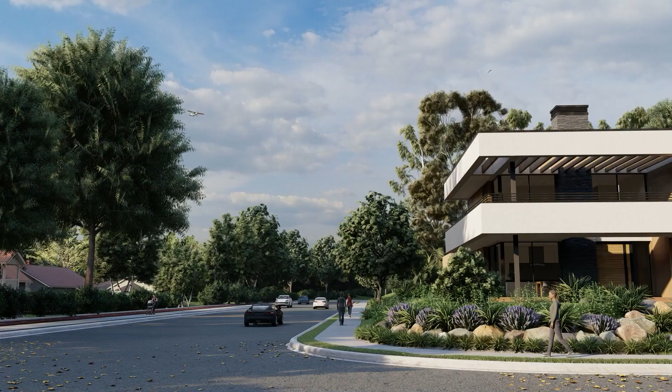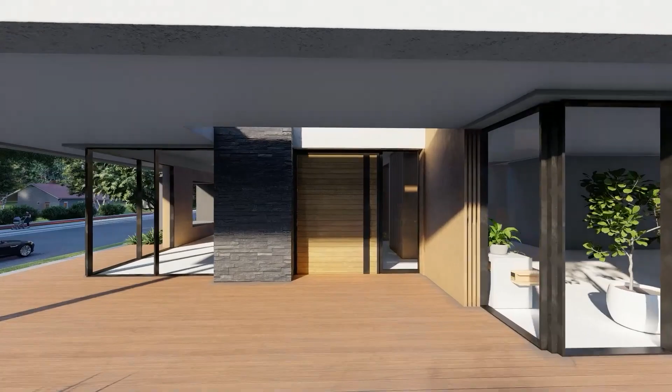Video clips and movies are crucial tools to make your clients live your design. It's not only the lights and materials, but also the narrative you create. It's the movement inside the space and the perspective at human eye level that you as an architect need to communicate for others to understand the subtleties of your creations.

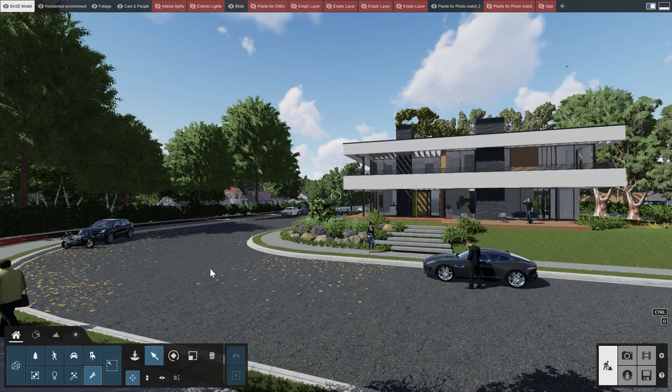Lumion comes with several features you can employ for your animations. The simplest way to understand this is in the hundreds of pre-animated library objects that you can place in your project. Take birds, for example. Simply select them and place them in your scene, and they will start flying in circles around the insertion point.

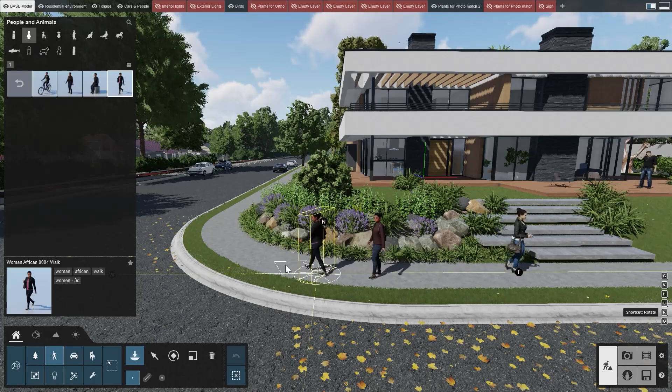Of course, these are not the only models that are animated. People in Lumion bring different animations to the table. Some are idle, some are walking, and some of them are even cycling. To make your people move, they require a trajectory to follow, unlike what we saw with the birds. A trajectory can either be from point A to point B, or a path.

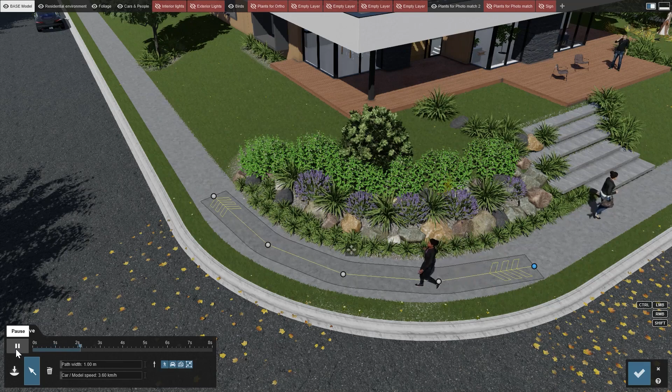The most common way to animate people along a non-linear direction, such as a curve, is to create a path. The Lumion 12 UI for the mass move effect comes with all the tools you need to control the direction you want objects to follow. Click on Edit, place a new path, then set the first point just behind the model you want to move. Now, move the cursor to a second point that represents the minimum required to define a path.

If you want to add more points, hold the Control key when clicking in the project. Then, you can use the Play button to preview the animation. If it doesn't work right away, move one of the points slightly. This will initiate the animation. To create smoother corners, click on a path point and you can increase the smoothness with the slider shown on the right.

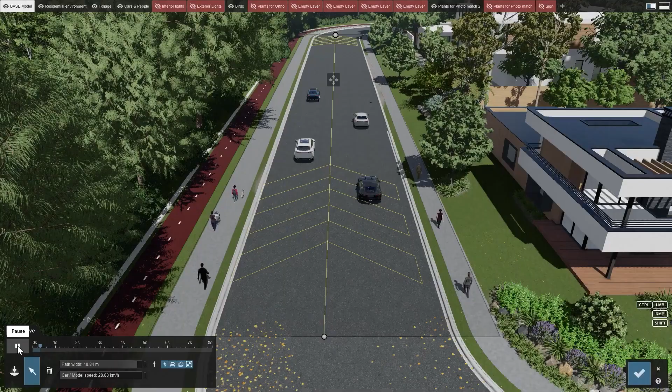The beauty of the mass move effect is that the path will move any object placed on it, which is great for moving multiple objects at once, including cars and cyclists. This way, you don't have to animate them individually. The 4 buttons under the timeline of the mass move effect indicate the types of objects that will move. You can select or deselect categories that you want to be affected by a path in your animation.

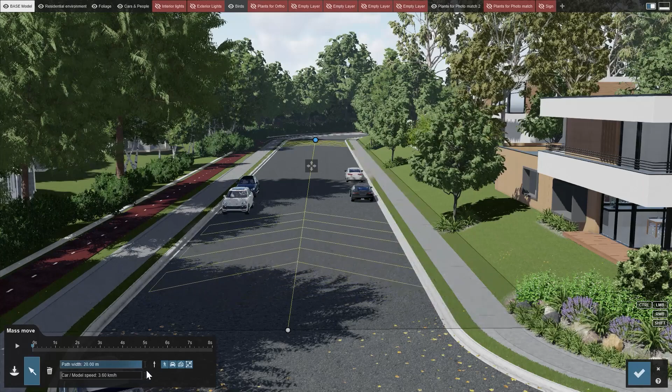At the same time, if you need the objects to move in the opposite direction, just click the direction toggle to reverse. Let me show you. Take these cars, for example. Click on Place New Path and set the first point in the center of the road. We'll keep it simple, so let's just add a second point in a straight line and make the path really wide to cover both the pedestrian path and the traffic lanes.

Set the car speed slider to about 30 kilometers per hour and test if the speed is adequate. Place a few more people on the pedestrian walkway and move the cars a bit further apart. Click on Play and you will see all the cars and people start to move. When an object reaches the end of the path, its position is reset to the start point. This is not necessarily desirable in a video clip, so try to keep it off camera.

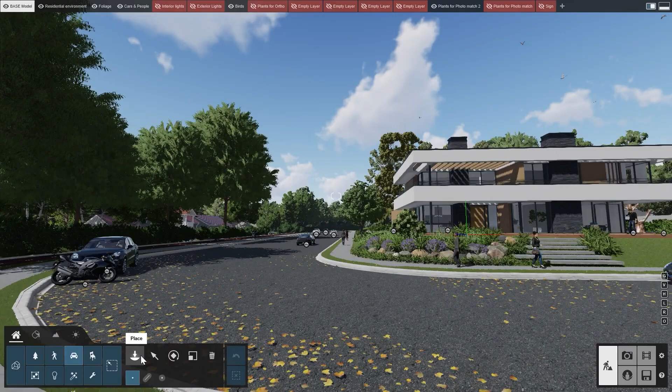Let's suppose you need to create more complex movements for a single object. Advanced Move is the effect that allows you to do that. Say we want to show a small aircraft flying in the background. Click on Place, choose the Air category, and select one of the flying planes. Place it in the far distance at a height of 100 meters.

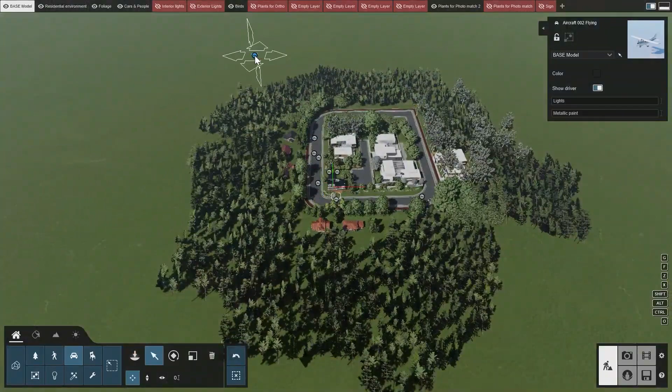It's probably best to zoom the camera out a bit so you have a better overview of the scene. Now, let's make a new animation clip at eye level. For example, here at the walkway opposite the house, add the Advanced Move effect and click on Edit.

Next, we need to select the object we want to move. Add the first keyframe using the little icon with the plus sign. Now, move the time slider to the end of the animation and set another keyframe.

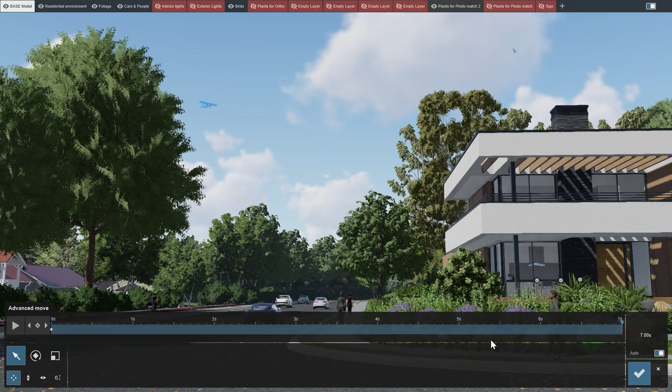To get the results we want out of this animation, we need to move the plane to the location desired for that moment in time. It can be tricky and you can either calculate it or eyeball it. First, click on Move Horizontal to keep the plane at the same height. Then drag it to the end position.

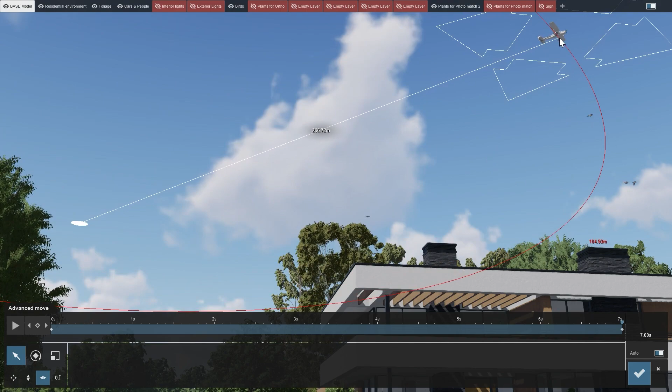Click on Play. Looks pretty reasonable. Now, let's see how it looks from the camera position of the clip. Click on Save Changes and then click on Play. You can always go back to edit the start and end points, or if you want to make a more complex animation of the plane.

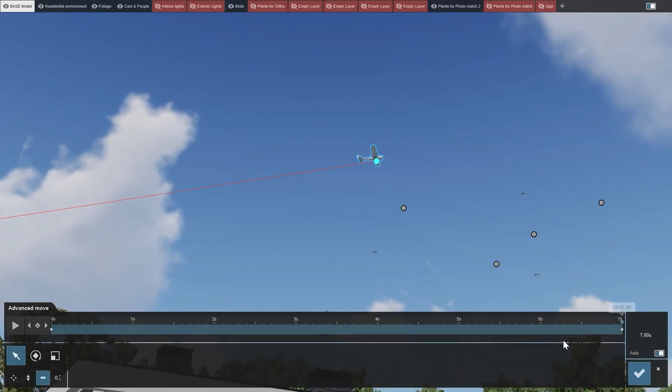Eye-level walkthroughs are a great way to showcase your work, especially since they give a good sense of space for the viewer. A great use for the advanced move effect in this context is to open doors while the camera moves through them. To make that happen, we need to separate the door from the house and export it as a separate object. Let me show you.

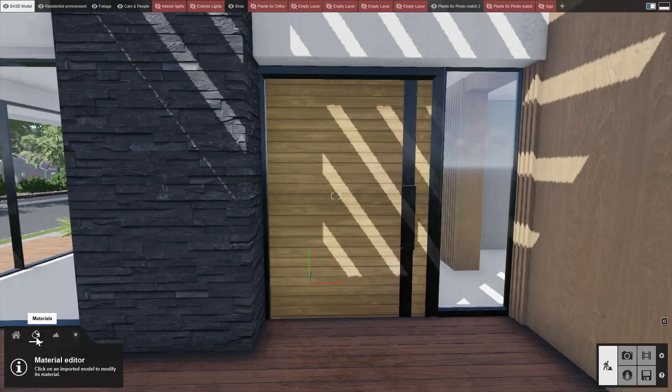Let's first save the materials we use for the door to a custom material, which will allow us to instantly reapply it to the door object that we'll import in just a moment. In your 3D modeling software, in our case SketchUp, create a separate grouping of the door. Hide the door and save your file.

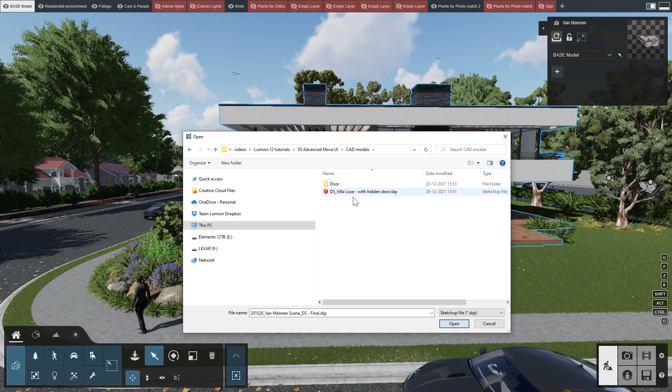In Lumion, select the house and click on Re-import Model. If you gave it a different name, press the Alt key. Now you have the house in Lumion without the door, but with all the material settings you made in Lumion preserved. Now, let's import the door as a separate object.

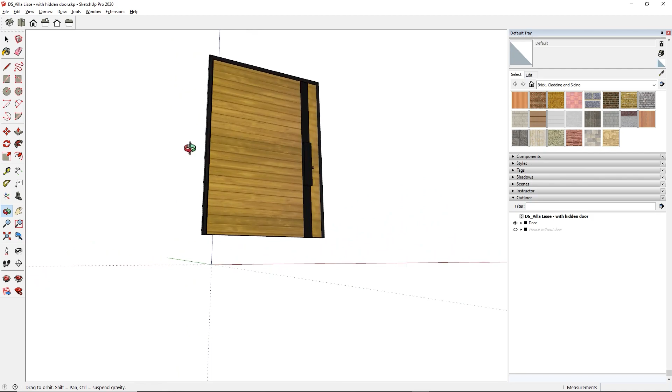Go back to SketchUp and hide everything apart from the door group. To make the door rotate around its hinges, we need to first shift the hinge point to the file's origin point. Now, export the object as a Collada file. Make sure you tick the Export Only selection set in the Export settings.

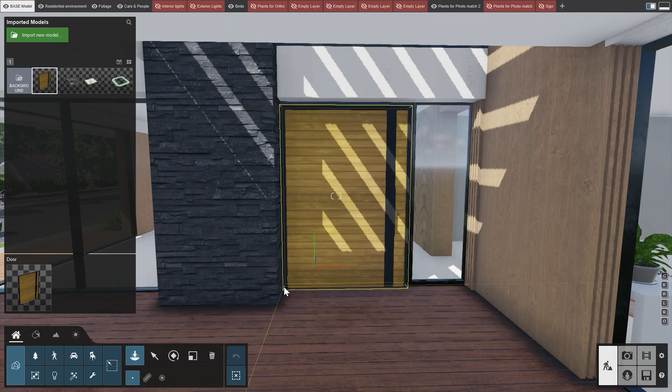Import the door object in Lumion. Place it at its initial location in the door frame and add the door materials again. Now, let's make an animation that starts in front of the house and goes through the door and ends inside, all at an eye level height.

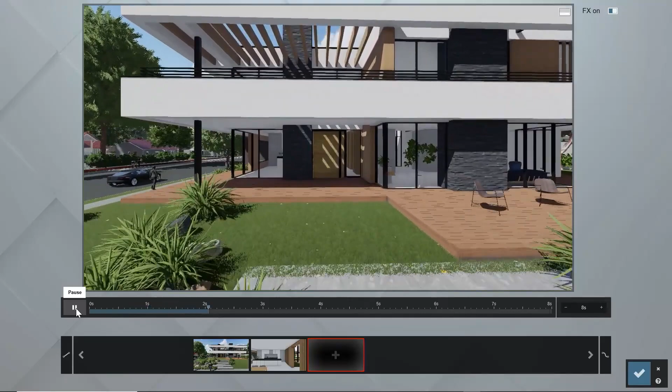That goes a little bit too fast. Increase the time to 8 seconds and set the ease out to smooth. That looks much better. As we approach the door, let's open it. At 5 seconds, it should start to open, and at 7 seconds, it should be completely open.

Add the advanced move effect. Click on Edit and select the door. Add a keyframe at the 0 timestamp, another one at 5 seconds, and a third one at 7 seconds. At the third keyframe, set the door rotation heading to 90 degrees.

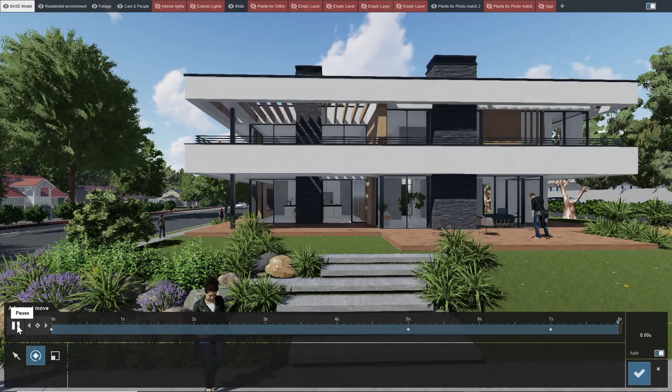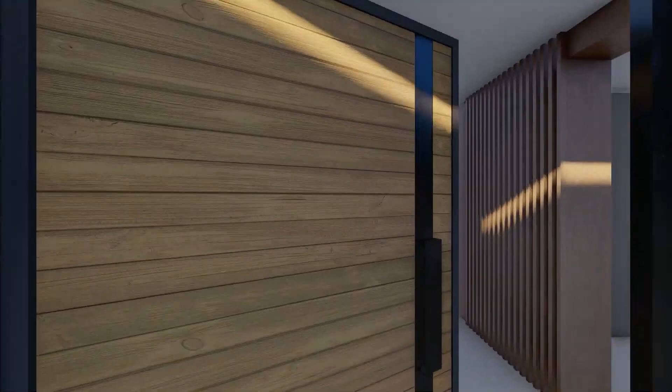As you can see, the door starts opening at 5 seconds and is completely open at 7 seconds. This is easy. Let's add the daytime style and render the clip. Looks pretty nice to me. As you've seen in this tutorial, animating objects in a Lumion clip is pretty straightforward. All it takes is just a few clicks and we're done.

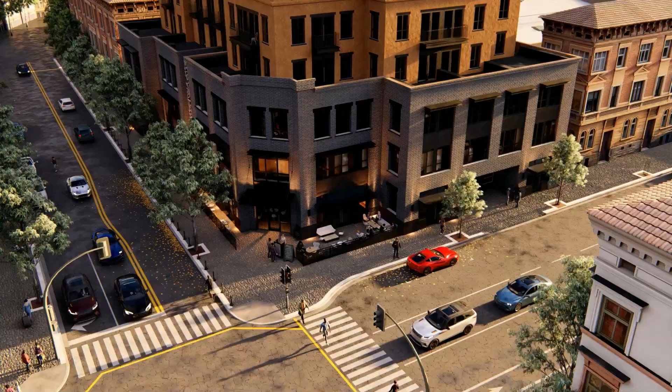Apart from the quality of the rendering, creating a sense of movement is an important detail that every architect and visualization artist should keep in mind. You can use the tricks I've just shown you to boost the atmosphere of your clips, and with the intuitive design of the effects interface, it can become a fun thing to implement in your projects. Now it's your turn to be the next Hollywood director, so open that animation studio and add some movement to your clips. I can't wait to see what you create.